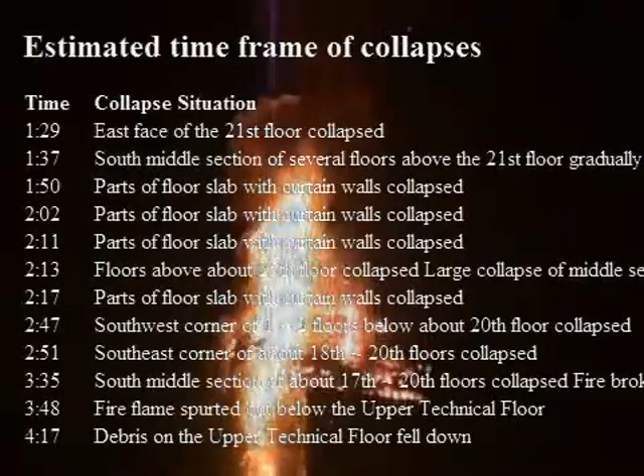It did not collapse. February 12, 2005, the Windsor Tower in Madrid suffered a severe fire on its upper floors for more than 24 hours. This building had 32 stories, 29 above ground and 3 below. It was framed primarily in reinforced concrete with steel perimeter columns supporting the floors above the 17th. The steel columns did collapse, but the collapse events were spread over a period of several hours. The rest of the structure remained standing.

May 13, 2008, the Faculty of Architecture building at the Delft University of Technology in the Netherlands suffered a large fire on its upper floors. After burning for more than 7 hours, this happened.

The progressive collapse was everything one would expect: localized, asymmetric, and nowhere near free-fall acceleration.

10 seconds for a 13-story building to partially collapse, yet we're being led to believe a 47-story building can totally collapse in under 7 seconds. The truth is, before 9/11, the term 'global collapse' didn't even exist. Buildings have survived fires, plane crashes, earthquakes, terrorist attacks, botched demolitions, and even nuclear explosions. Never before or after 9/11 have we seen such catastrophic failures.

The coup de grace for me was when I found out that Building 7 had collapsed later that day. And when I saw Building 7 come down, to me, the fact that it looks like a perfect controlled demolition of an intact building—I mean, that's what I call a smoking gun.

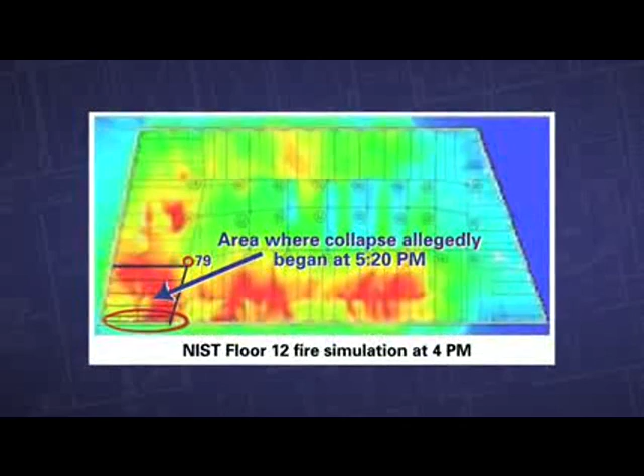There have been fires that burned longer in similar structures without any collapse. NIST claims the fires were very large, very hot, and long-lasting, when in reality, observation, which has been researched by many people, shows these fires did not last very long. They were not in the locations where NIST claims they were at given times.

I'm a fellow of the American Institute of Architects. For the 40-plus years that I've been practicing architecture, I've designed a variety of buildings from small houses to high-rise office buildings. Some of the high-rises I've worked on are One Shell and Two Shell here in Houston. I was project manager for a 22-story office building in Akron, Ohio.

Later in the day, when World Trade Center 7 collapsed, they had already shown us pictures of a few fires in that building, and I mean, they weren't even raging. How could that cause a building to collapse as if it were imploded? Couldn't happen.

According to lead investigator Shyam Sunder of the National Institute of Standards and Technology, NIST, World Trade Center 7 collapsed at freefall acceleration for more than 100 feet of its fall. What does the speed of the collapse reveal to us?

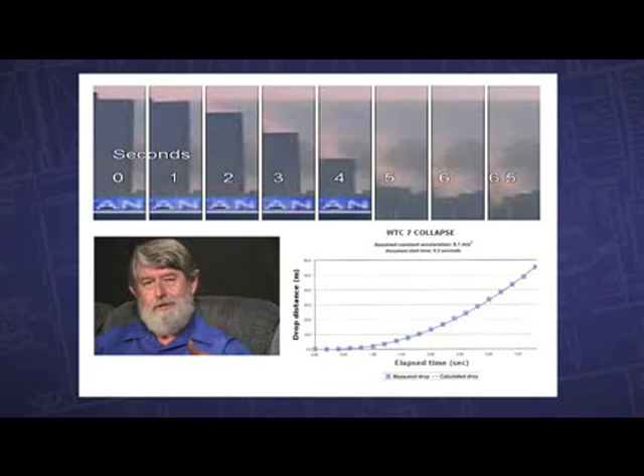Essentially, in less than 7 seconds, Tower 7 came down upon itself. It's just like taking your car keys out and just dropping them. That's how fast the building came down, for over 100 feet. And the only way you can get that is when there's zero resistance. So what we're looking at is a building just coming straight down, falling right through itself with zero resistance.

Buildings don't have zero resistance, which is why you feel comfortable walking into a building. This building had 40,000 tons of structural steel in its structural system, intended to keep it from going anywhere. NIST is telling us that the building below it ceased to exist for the first few seconds of the collapse.

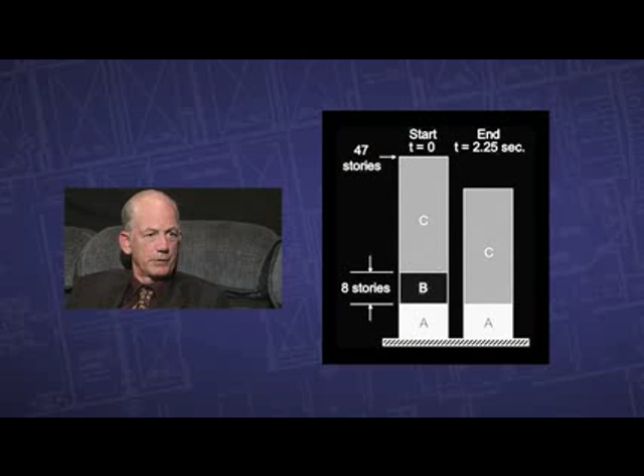Well, things in physics just don't cease to exist and cease to resist the forces that are on them. The building didn't disappear, so the building can't fall for 100 feet at freefall speed. That's impossible. That's a violation of the fundamental law of physics that says for every action there's an equal and opposite reaction. If floors fall, they tend to fall and are braced by the floor directly beneath it, and there's some delay there.

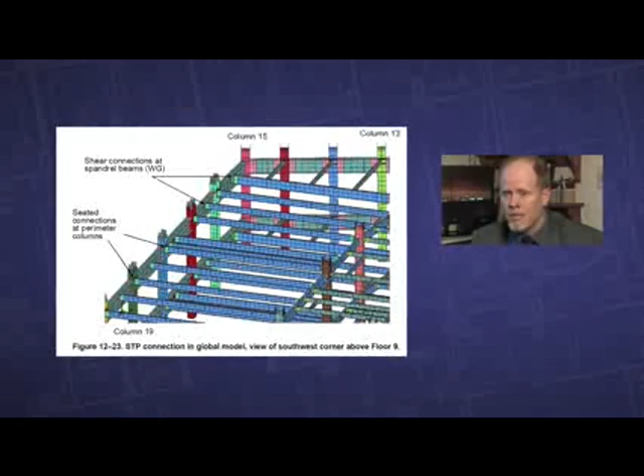Because of redundancy, because of all the other columns in the building that were not affected, even if a floor were to collapse, it still wouldn't be able to collapse all of the connections simultaneously at the rate that it did without secondary explosions.

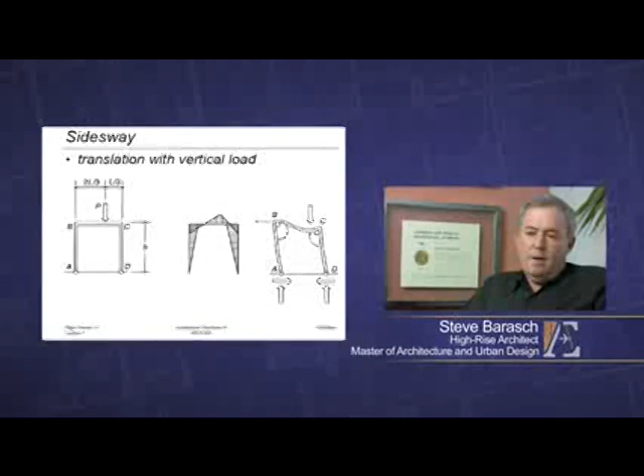We might anticipate that an unevenly damaged building would fall over. Yet videos of the collapse of Building 7 show a fairly symmetrical fall. How do we make sense of this? If the building had come down by fire, we would have seen a more natural progression of collapse, and clearly a more asymmetrical pattern should have been present.

The symmetry is the smoking gun. It cannot happen that when you have asymmetric damage, you will get a perfectly symmetrical collapse. The exterior columns on the outside as well as on the inside, at the bottom, would have to be severed almost at the same time.

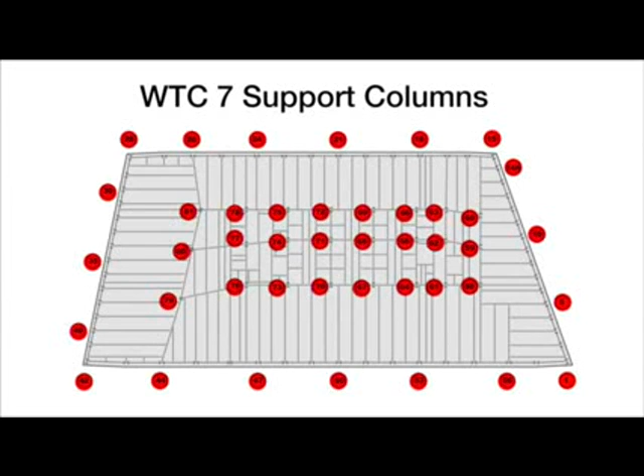I worked for Controlled Demolition Incorporated, CDI, the top-rated explosives demolition firm in the world. What I saw, it was a classic implosion. The center of the core, the penthouse area, starts to move first, and then the building follows along with it.

That's another indicator that this NIST report is very suspect. When it's all finished, the outside walls are piled one on top of the other right in the middle of the building, just like a house of cards if it were coming down.

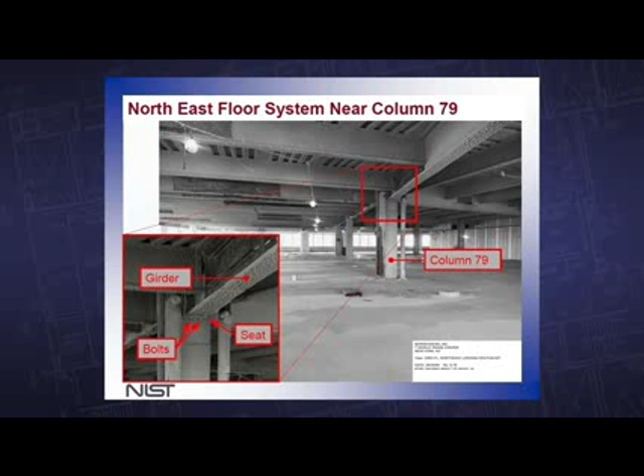According to NIST, the failure occurred at column 79 on level 12. This means basically they're talking about a single columnar collapse or failure that resulted in a total collapse of the building. That just does not make any sense.

The explanations from FEMA and from NIST don't add up. But there is enormous circumstantial evidence, circumstantial and actually physical evidence as well, that would lead us to a different conclusion. And the conclusion is controlled demolition.